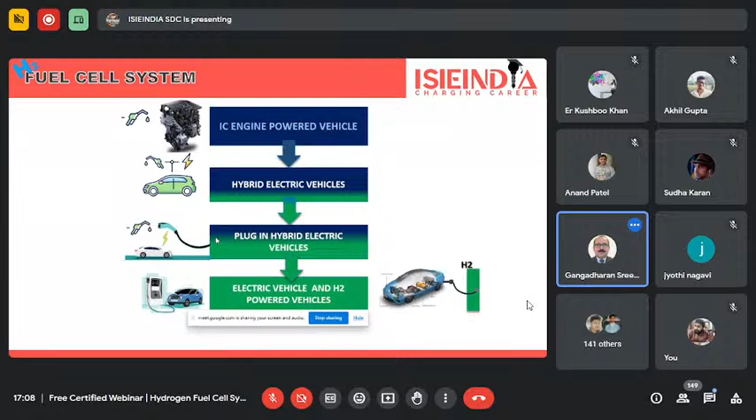In this section, we are going to discuss the fuel cell system and fuel cell transaxle, and also the hydrogen system diagram, high voltage system for safety inspection purposes, and also the service plug grip for safety and voltage inspection for high voltage safety. Finally, the refueling procedure, and also how the FC power can be shared for some other purpose like a power generator.

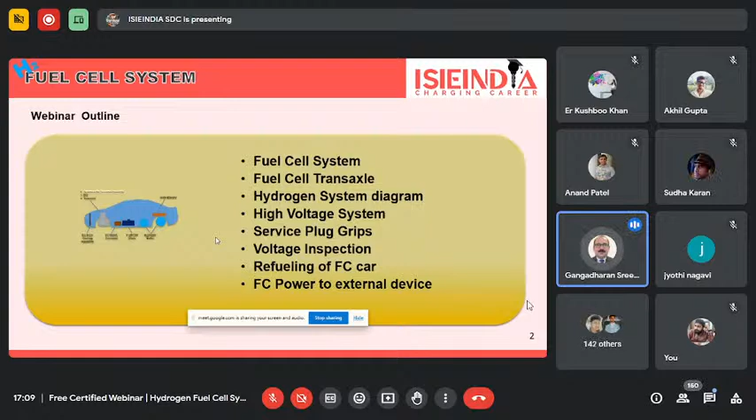We can use this vehicle for that purpose. So this will be the content of our presentation today. Let us start with the system diagram with the components of the fuel cell vehicle.

Here we are using Toyota Mirai as an example vehicle. In India, a lot of heavy vehicle industries have started fuel cell development, like Tata, whose prototype vehicle is already available in India. But globally, everybody knows the fuel cell Toyota Mirai sedan type vehicle is already running, with thousands of vehicles all over the world. In India, 2 vehicles are available, one with our union minister and one with another university.

So today our subject, we will use this vehicle as a standard fuel cell vehicle. Let us see the components of Toyota Mirai, starting with the NIMH battery. You can see on the top, the battery is located.

This will be the NIMH battery on the top, because a fuel cell vehicle is a hybrid vehicle. The fuel cell system cannot store electricity; it only generates electricity, we cannot store it back into the fuel cell. That's why we use one high voltage battery. For safety purposes, we are not using lithium ion batteries here, only NIMH battery. Maybe in the future we will have lithium ion batteries also with fuel cell type vehicles.

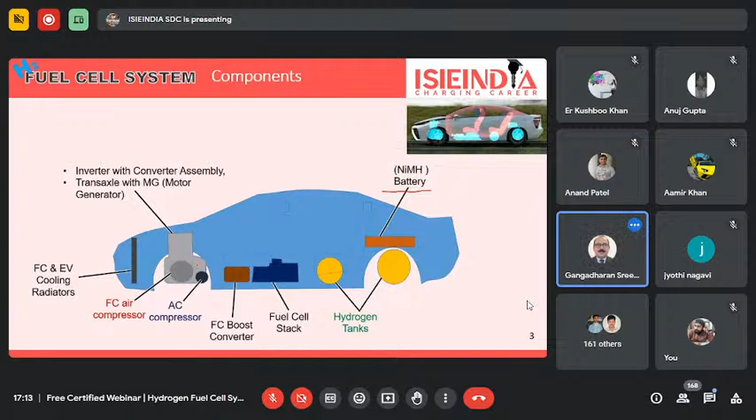And next is the air compressor, which is integrated with the inverter, converter and transaxle assembly. Then in front side, we have a cooling radiator, the FC cooling radiator, which we use for cooling the transmission, the FC fuel cell stack, and also this can be used to cool the battery if necessary.

Finally, the inverter with the converter assembly and transaxle with the MG, motor generator. So the inverter with the converter assembly receives power supply from the FC boost converter and then converts it into AC signal, AC power supply, and provides it to the MG motor. And also that power will provide to the FC air compressor. So these are the components and their functions.

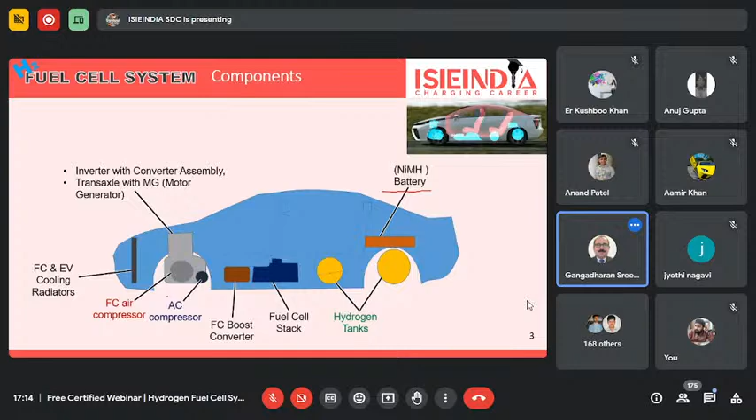Now you can see in this picture an actual Mirai vehicle with all those components we have explained, like the NIMH battery on top of the rear tank. The rear tank has higher capacity, around 62 liters of hydrogen we can store. And in front of that, there is one more tank provided, always under the rear passenger seat, the second hydrogen tank, which can store up to 60 liters of hydrogen.

Then we have the aluminum colored component, which is the fuel cell stack. The actual component is shown here. And in front of the fuel stack, we have the FC boost converter. This is the assembly having the inverter with the converter. So you can see the inverter with the converter.

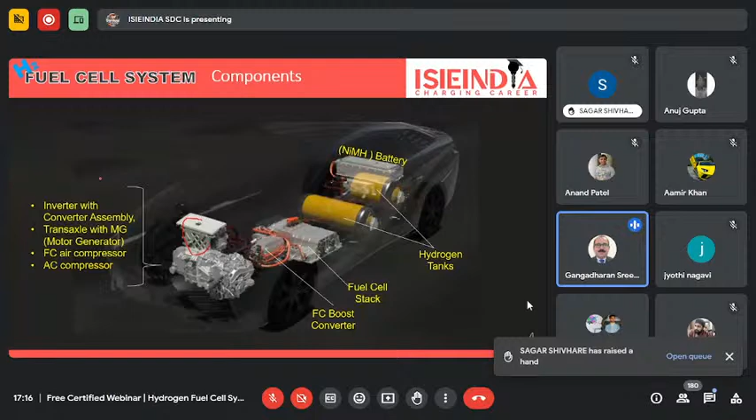And inside the transaxle, we have the MG, motor generator. Why motor generator? Because this motor, whenever it is in motor mode, it is driving the vehicle, and during braking, it converts into a generator and generates electricity. That electricity we can store in the rear battery. Then we have an FC air compressor attached with the same assembly, and also the AC compressor.

So let us see how these systems are functioning.

We have an air compressor attached with the inverter and converter assembly. That air compressor continuously compresses the fresh air through the filter, then sends it through an intercooler. The compressed air, while compressing, increases in temperature, so that temperature is reduced with the help of an intercooler, and that cooled compressed air is supplied to the FC stack.

The FC stack has supply from both sides. On the left side, the negative side of the FC stack, we supply hydrogen, and on the positive side we supply compressed air. So what happens? The FC stack generates electricity. It generates DC, around 370 voltage is provided by the FC stack as DC power supply.

That 370 DC power supply goes to the FC boost converter. That boost converter converts it into the necessary voltage level according to the driving torque, because this conversion is controlled by the fuel cell vehicle control ECU.

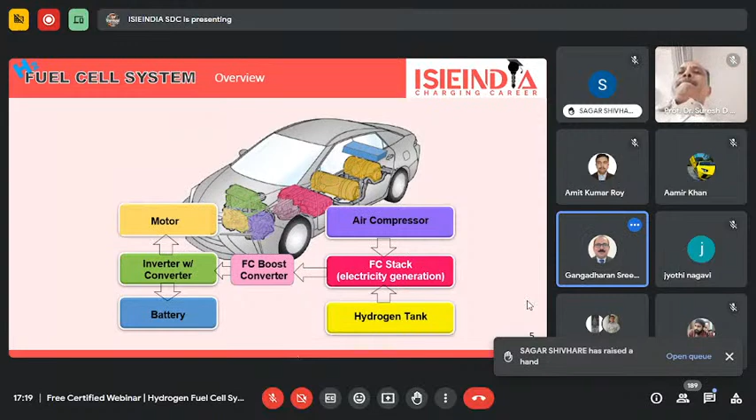Okay, so now I'm showing the fuel cell stack assembly. Am I audible? Yes sir, yes sir, yes, okay sir.

Okay, thank you. Now see the fuel cell stack in the middle of the vehicle, which was located in the earlier model. Now we have changed, 2018 onwards the design of this vehicle is totally changed. The location of the fuel stack is inside the engine compartment.

When they produced the first model, Mirai, which is a Japanese word meaning future in English, at that time, to bring the center of gravity further low, they provided the fuel cell stack location under the driver seat.

So this fuel cell stack, as you can see in the animation, has around 370 cells connected in series. Each cell develops around 1 voltage maximum. When you supply maximum hydrogen and oxygen, it will produce 1 voltage. So depending on supply it can be less than 1 voltage, that is the capacity of the fuel cell. When you connect them in series, you get 370 voltage maximum.

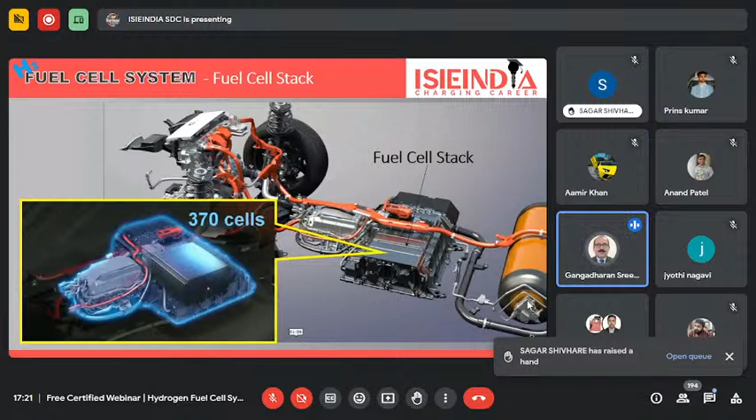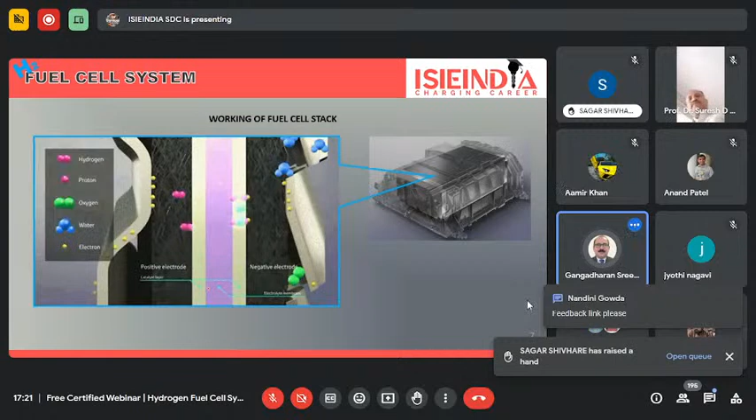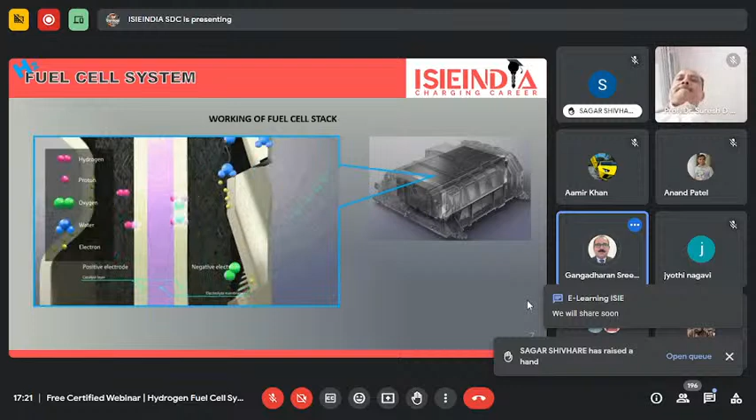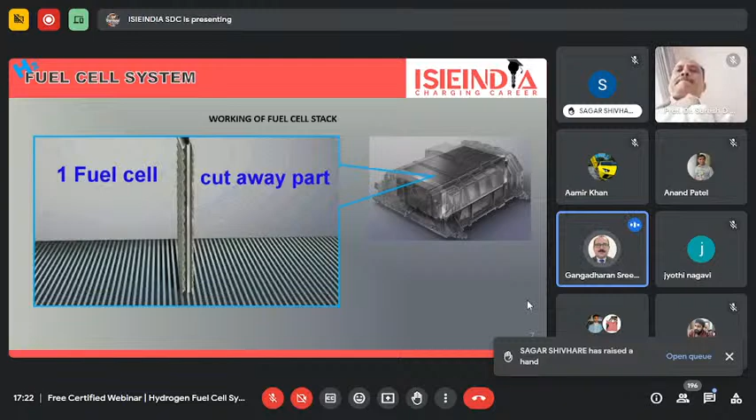Now let us see this fuel cell, how it is functioning. Here I am showing one sample cell, and in that cutaway you can see in the middle part there is a membrane located, a violet color membrane, which is a polymer electrolyte membrane, sandwiched with two catalysts for the positive side and negative side. On the other sides we have gas diffusion layers. So these are the major components.

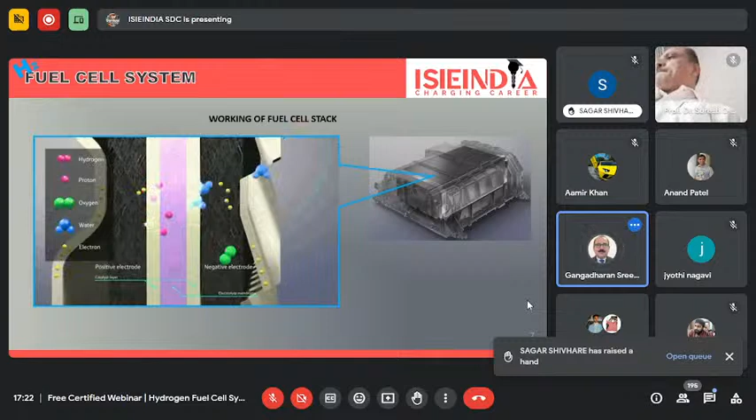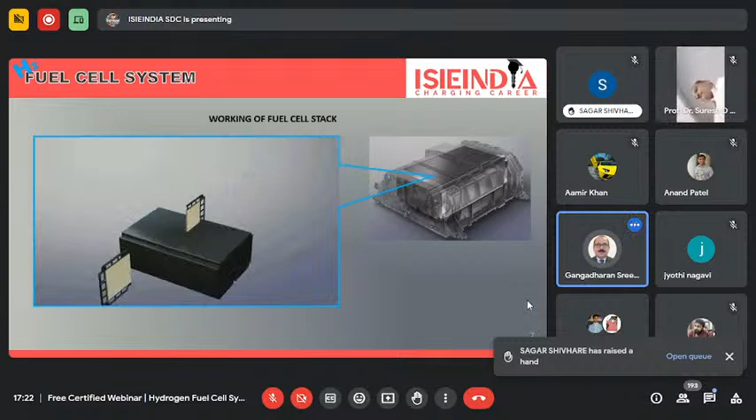What is exactly happening: through the negative side we send the hydrogen, and from the positive side we send the oxygen. What is happening as hydrogen moves, we can see the components through this, it will be more easy to understand.

You can see hydrogen, when it passes through the catalytic layer, it loses an electron. So any molecule or atom, when it loses an electron, what happens? This hydrogen molecule becomes ions. So the proton alone will move through the catalyst, through the membrane, to the positive side. What is happening to the electron?

The electron, which is passing through the electrode attached right after the gas diffusion layer, there will be electrodes, negative electrode and positive electrode. So the electron which is released from the hydrogen will move through the electrode and come back through the positive electrode to the

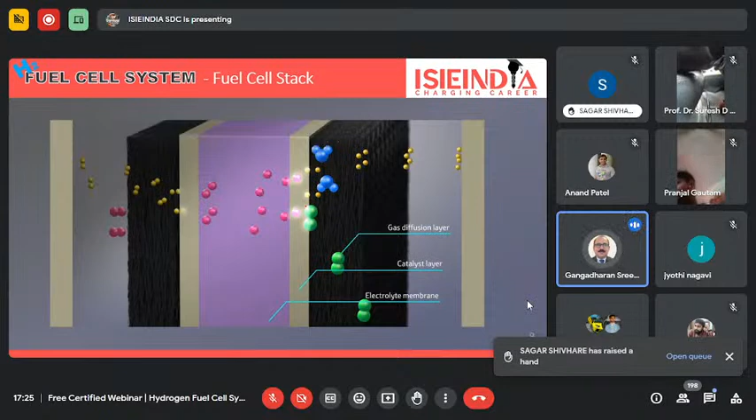So let us see the fuel cell stack, how the structural parts help assemble the 370 cells together. You can see both sides we have the electrode. This is the negative terminal which is connecting with the FC boost converter. This is the positive terminal. So in between, the cells are serially connected.

And we have a safety concern here. Do not touch this component if there is any chance - if there is hydrogen and oxygen inside the stack, what will happen? It can produce electricity. If the voltage generated is more than 60, that will affect our heart's ventricular valve, so it will be dangerous. We have to be very careful.

Just for studying purposes only we are explaining this, but when coming to actual practical work, or if there is any chance to measure or conduct any research, testing, or validation, and there is any chance to touch it, we have to use proper personal protection equipment like gloves and so on. So these are the structural parts to assemble all 370 cells together.

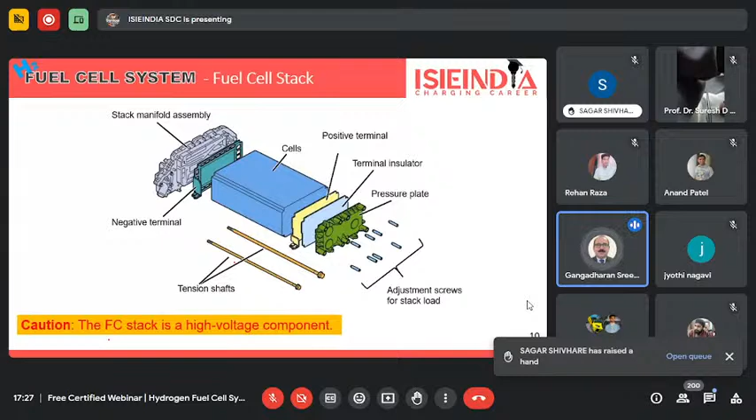Now, when we come to the individual cell in the actual fuel cell, how are they composed? Do you know the thickness of one cell is only around 1.3 millimeters? That means we have 370 multiplied by 1.3 - you know what will be the overall size. So it is a very thin layer.

In that, the electrolyte membrane with the catalytic layer and gas diffusion layer assemble together as one unit - that is the yellow part. That is the main device that generates the energy.

Then we have a supporting 3D fine mesh flow field, which helps the oxygen flow vertically. On the other side, you can see the holes provided on the side of the cell. Here we have the inlet of the hydrogen, and on the other side, this will be the outlet from where the hydrogen is coming out.

Okay, so hydrogen will circulate until the percentage density of hydrogen reduces, so the pressure will automatically reduce. There will be a pressure sensor, and the hydrogen supply system will act on top of the hydrogen.

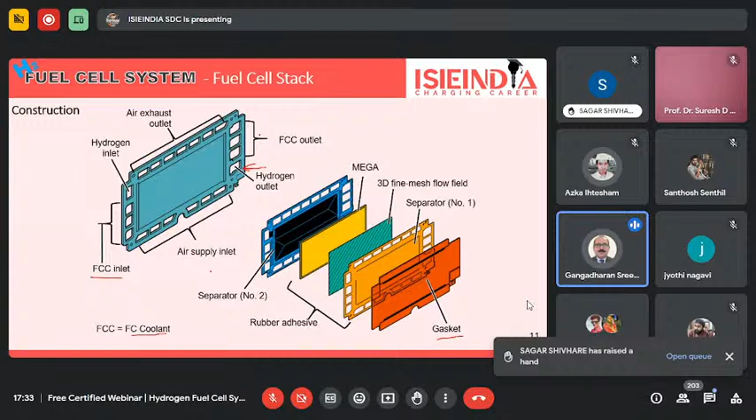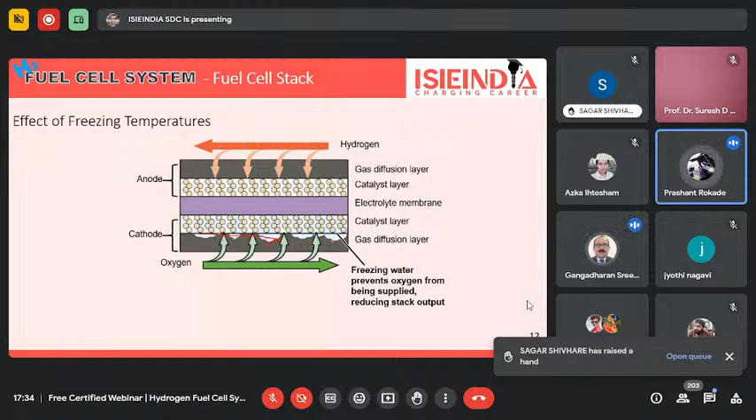Water is formed due to the chemical reaction happening inside the fuel cell - what reaction is happening? Oxygen and hydrogen merge together and they develop water. So the FC system produces water as a byproduct of electricity generation.

Some part of the water we are using to moisturize the air supply, because we are not supplying dry air - we need a little bit of moisture content, because the polymer electrolyte membrane in the fuel cell will work 100% efficiently only with the help of water. If there is a dry membrane, the efficiency of the membrane will be around less than 40%, or sometimes it can be below that. So to improve or maximize the efficiency of the polymer membrane in the fuel cell, we need water in the air system.

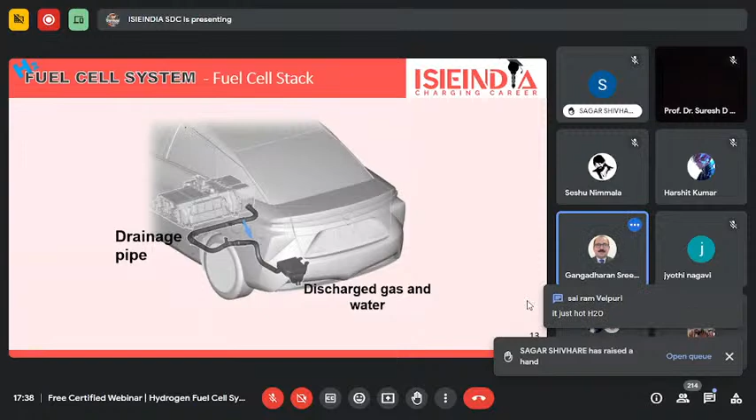Every electric vehicle has a motor and a motor speed reduction mechanism. Here we are using a planetary gear mechanism, and also a preloaded differential. Normally nowadays most vehicles use the preloaded differential system. For transaxle fluid, most manufacturers, even Hyundai, Kona, MG, all electric vehicles, use the same WS world standard automatic transmission fluid. The capacity of this transaxle is around 4.2 liters of fluid.

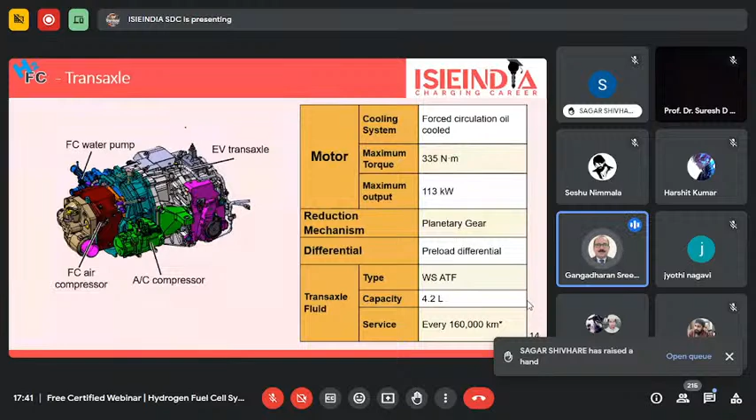What is the interval for changing this fluid? Normally companies say this is lifetime use, no need to replace. But if you can, change it every 160,000 kilometers, that is around 3 to 4 years of use, you have to replace it.

Now, when we are coming to the hydrogen system, so far everything okay? Am I audible? Yes, sir. Yes, sir. Okay.

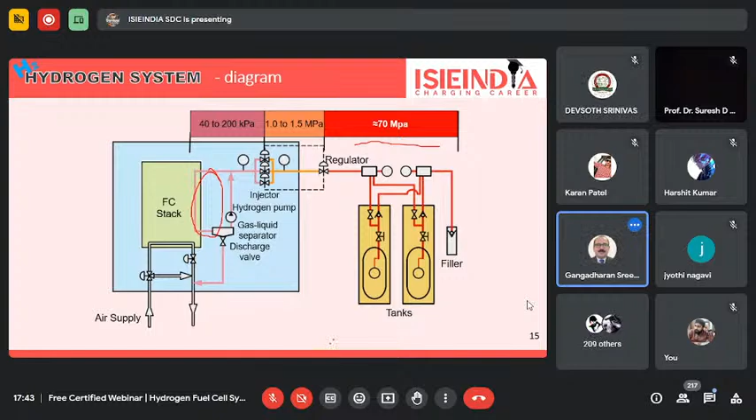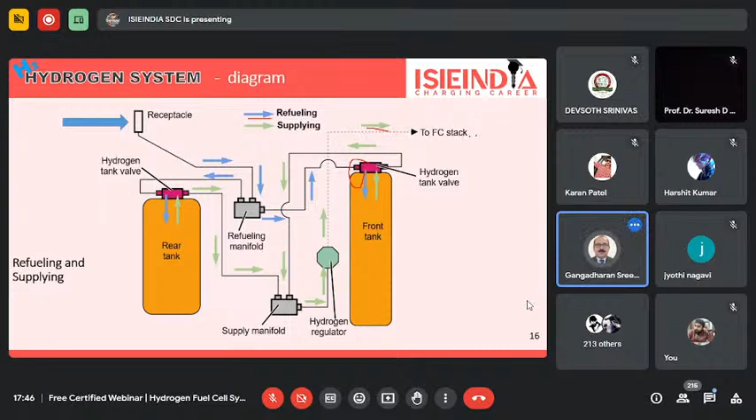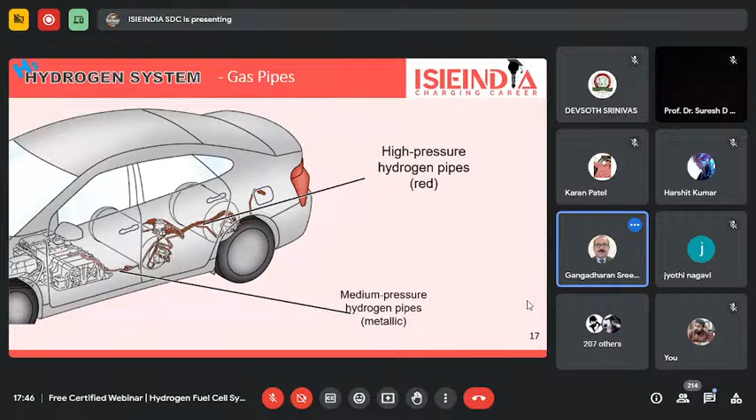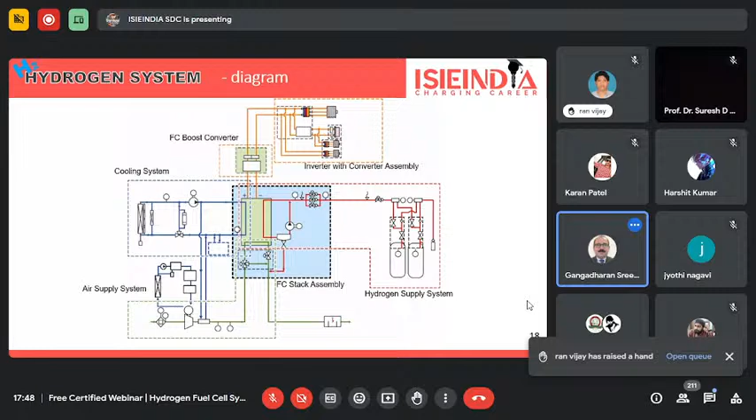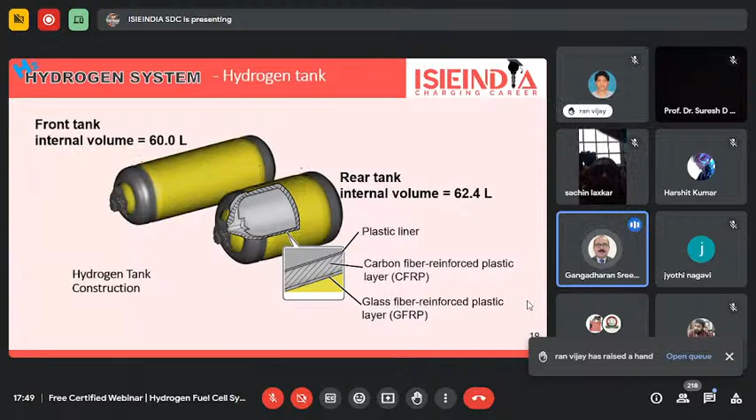See the capacity of both the tanks shown here. The tank which is under the driver seat is around 60 liters. The tank provided at the back side of the driver seat is around 62.4 liters.

Now we are coming to the safety side of the hydrogen fuel cell system. The fuel cell system is like a high voltage battery electric vehicle, also running with a higher voltage. Any voltage more than 60 is hazardous to human beings. So whenever we are handling this type of vehicle, we have to take special care. So what are the steps to handle the hydrogen powered vehicle?

First of all, whenever you bring this vehicle for testing, research, or even inspection to measure the voltage or pressure of the system, whatever you want to do, if you touch the high voltage area, we need to put a sticker on the vehicle. If you can provide the number of the technician working on that vehicle, that's much better. Both the instructions must be on the vehicle: this vehicle is under repair, please do not touch without permission. That warning should be there. That will be the first step.

Then we need personal protection equipment like safety shoes and insulated gloves. Insulated gloves means gloves with the ISI mark that can withstand up to 5,000 voltage. Gloves are required.

Then, how to shut off the power supply first. Everybody knows how to turn off the vehicle, but you should not keep the ignition key inside the vehicle. Keep the vehicle key after turning off the vehicle, keep the key away from the vehicle, around 1.5 meters away, so the key will not communicate. Nowadays everybody knows smart keys are there, that key will communicate with the vehicle, so at that time we can avoid that communication.

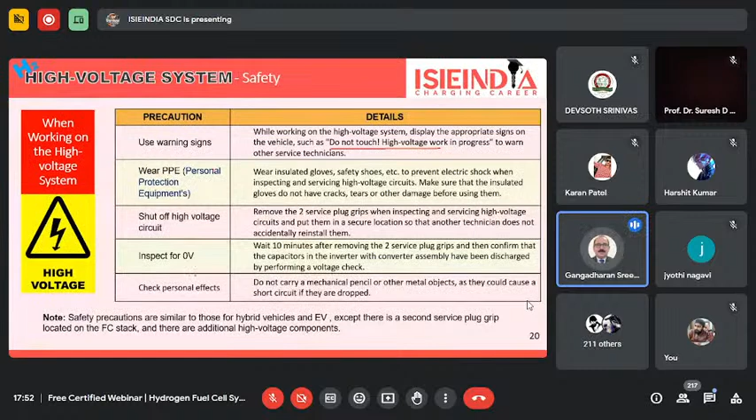After shutting off the voltage, we are going to remove the service plug, to cut off the high voltage from the fuel cell stack and also from the high voltage battery. Then we need to inspect. I will show you the steps one by one. This will be the high voltage service plug provided on top of the fuel cell stack, and one more will be at the backside with our high voltage battery. Both service plugs must be removed properly.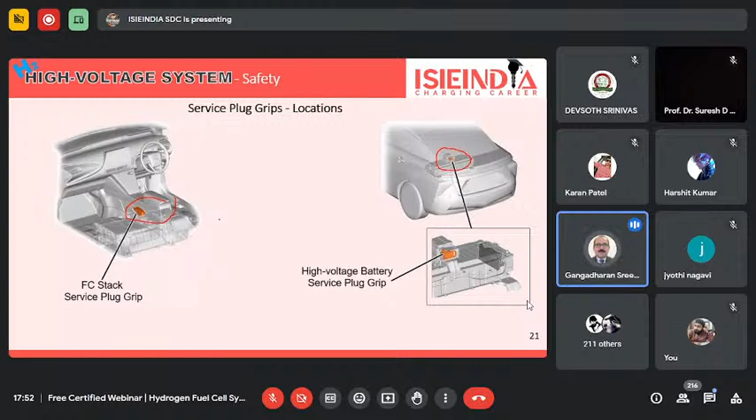So to remove it, we have safety precautions. Please wear ISI marked gloves, and then follow these steps. I'll show you the steps.

This will be the step for how to remove the service plug. First step, you have to pull it and then turn it 90 degrees, then take it out. While inserting it, we need the same procedure, just opposite: insert it, then bend it 90 degrees, then lock the system. There will be a clicking sound while you are pressing it back.

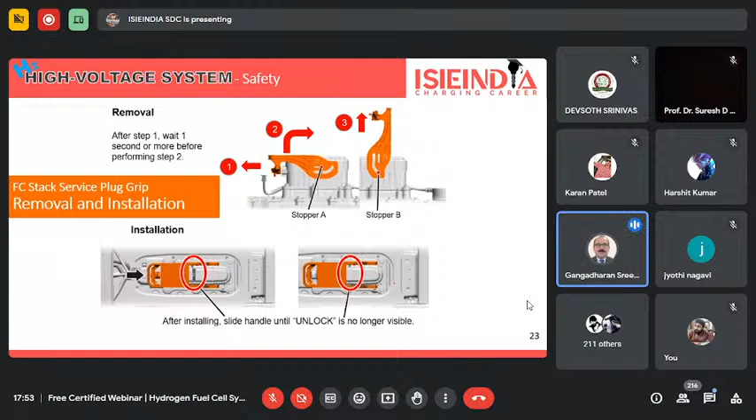If we want to touch the boost converter or any electrical components, we need to make sure that no voltage is provided by the FC stack and also the high voltage battery. Normally when you turn off the vehicle, these two relays will turn off the power supply, but we need 100% surety, that's why we are removing this service plug grip.

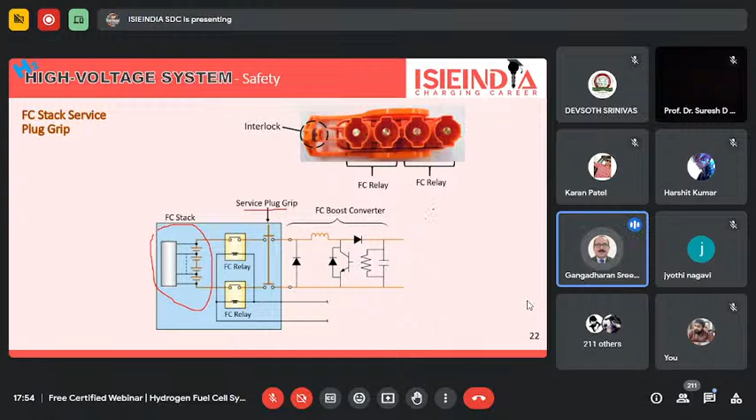So there is no power supply to the outside circuit. What will be the next immediately after the fuel cell stack? Our boost converter, so the boost converter will be switched off immediately. So no power supply. But still we cannot believe because there is one more step available, we need to make sure that system voltage is zero.

So we have an inverter converter assembly in the engine room. Just open the hood and there we can find two inspection points provided, one for negative and one for positive. So we have to use a voltmeter that can measure up to 750 voltage, because this boost converter uses a high voltage capacitor for boosting purpose.

So the inverter and converter, and also the boost converter, use capacitors. These capacitors can store some amount of electricity, so to make sure, we need to measure it. Before measuring, you have to give a 10-minute time to let this capacitor self-discharge. After 10 minutes only, both the service plugs have to be removed first, then we come to measuring and confirming zero voltage.

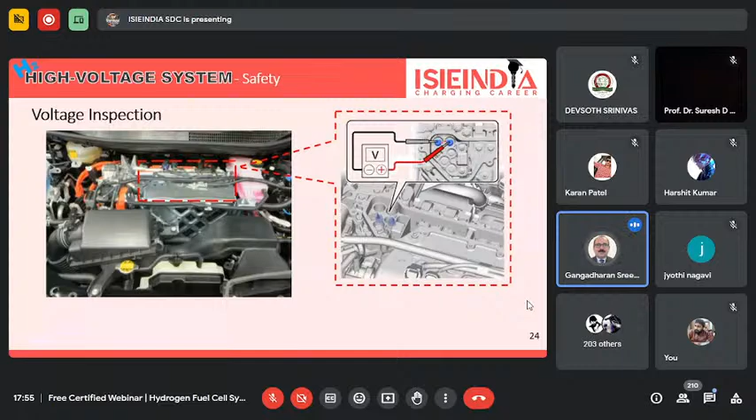Once it is showing zero voltage on the multimeter, now you are free to do anything, any inspection, because nowadays fuel cell vehicles in India we are just using for studying purposes, doing some testing, some validation process, everything going on at the university level. That's why I'm giving this instruction, because we have to be very careful about the high voltage system.

Now, how to do the refueling? For refueling also, there is a button available to open the fuel tank lid, but it is not the same as our conventional IC engine vehicles' petrol tank, where pressing automatically opens it. Here you have to turn on, press the button, then turn off the switch.

First of all, it comes out from the ready mode, meaning turn off the ignition and remove the key, then press the button. Within 5 minutes you have to come and do the next step, because if you do that after 5 minutes, you have to repeat the same process again. That is for safety purposes, so we have 5 minutes to come and press the fuel tank lid.

When you open the fuel tank lid, what is inside? Still one more cap is provided there. That cap is for safety of the receptacle inside, which connects directly to the hydrogen fuel tank. This must be kept very clean, no dust and water should be allowed. If that cover is open, don't even think about washing the vehicle or anything. Okay, so open it and fill the fuel.

After that we have to close the lid, then only the vehicle will move. If you forget to close the lid, the vehicle will not move, the ready mode will not come. So first we have to fill the hydrogen, then close the lid, then only you can turn on the vehicle. In case while filling hydrogen you come and touch the ready mode or use the key to turn on the vehicle, what will happen?

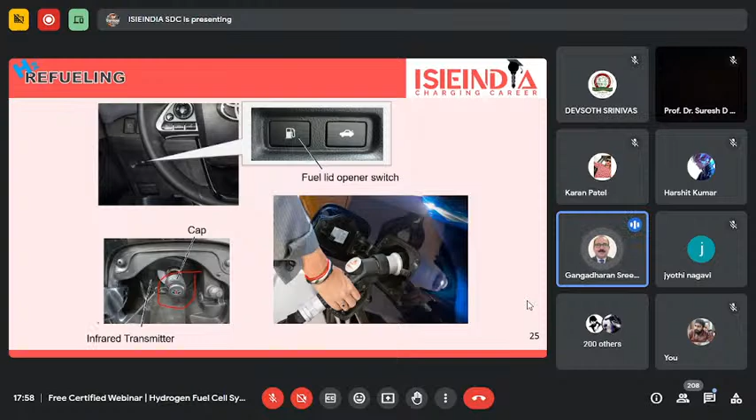Now we are coming to the last section. These vehicles' fuel cell stack just converts hydrogen and oxygen into electricity, so we can use this vehicle like a power source, like a generator. There is a plug available at the back side, open the trunk and you will see the steps shown there.

Number one, we remove the cover and insert the external power supply unit. Since we are using a DC source, we need an inverter. With that inverter you can operate any domestic appliance. The process is very simple: open and connect the external power supply unit, then turn on the power.

Then one more step: there is a DC out button available in the vehicle. While pressing that, you will get power supply. Even your house, if there is an inverter connection with your house, you can connect that plug with the vehicle. So you can use this vehicle like a generator.

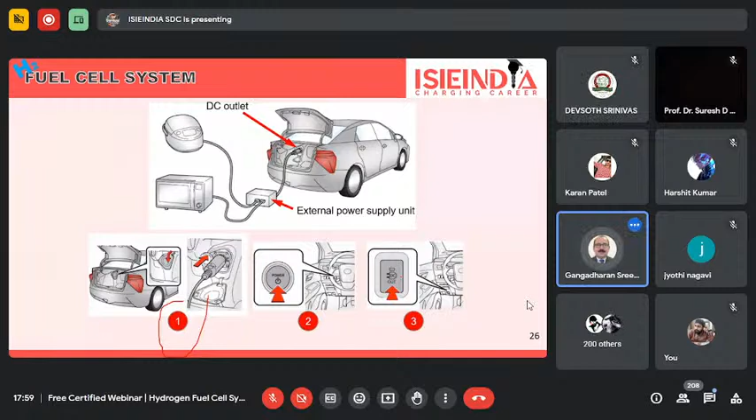Okay, so with that we are winding up. Let us see the subject again, the fuel cell system. In that we discussed the fuel cell stack and the cell construction, everything.

What was the next? Fuel cell transaxle, then hydrogen system diagram, high voltage system for safety, and also service plug for the safety, voltage inspection procedure for the safety, and finally refueling procedure of a hydrogen fuel cell vehicle. And a fuel cell vehicle can use like a power source for our domestic purpose. With that, we are coming up with the end of the presentation.

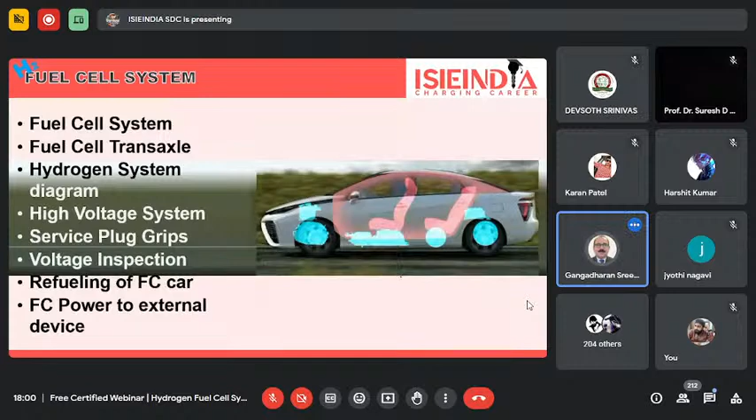Now, question and answer section. Do you have anything specific from the presentation, anything to discuss? Professor, I have one question.

Tell me. Actually, the major issue is safety with the use of hydrogen vehicles, right? Yes, exactly. Now, the vehicle I was showing throughout our presentation is the first generation, because at that time 70 megapascal capacity was the tank pressure capacity. Now they have reduced it. Toyota and other manufacturers also reduced it. You can see in India now a lot of heavy vehicle manufacturers are moving with the fuel cell vehicle, and also hydrogen powered IC engines are available nowadays. So the tank pressure is reduced now because of this safety issue, because if hydrogen is leaking, it is like a highly explosive gas. So you are correct. Continuous improvement is happening, and 4 sensors are provided inside the vehicle to observe the hydrogen leak.

Professor, my other question is basically, is it only the electrolysis process which will generate hydrogen, or are there other processes, like renewable energy sources, or biomass, from where we can get hydrogen? Because electrolysis is a very costly process, and the cost of the vehicle will also be affected if we use electrolysis. And second, another problem is generation of water, we need some kind of water also parallelly, right?

Want to expand your knowledge of electric vehicles and secure a good job in the automotive industry? Let us help you get there with our online and offline programs. ISIEINDIA offers specific domain courses as per industry demands, with perks like pay after placement, no-cost EMI, placement assurance, and globally valid certification by the Automotive Skill Development Council (ASDC) and National Skill Development Corporation (NSDC), Government of India. We have a range of courses in electric vehicles, computer-aided design and engineering, including postgraduate certification and executive PG programs in EV, professional master certification programs, specialization programs, fundamental programs, and internships in EV, CAD and CAE.

Our postgraduate certification program in EV is specially designed for students, with 120+ online learning hours and 100+ hours of industrial projects and internship, giving exposure to various computational tools for hybrid electric vehicle applications. It is a 12-month assured placement course with pay after placement, encouraging learning without financial constraints. The course is globally valid, certified by NSDC, Government of India.

Our executive postgraduate program in EV is specially designed for working professionals who want to upskill themselves or look for a career change in the EV industry, with 120+ online learning hours and 20+ hours of industrial projects. It is a 9-month assured placement course with globally valid certification from NSDC and ASDC, Government of India.

Our professional master certification program in EV, CAD and CAE is specially designed for undergraduate students to pave their career path by providing industry-relevant skills, with 100+ online learning hours and 5+ hours of industrial projects. It is a 6-month placement assistance course with globally valid certification from NSDC, Government of India.

Along with courses for skilling, reskilling and upskilling, at engineering institutes across India we are setting up a state-of-the-art facility, the Center of Excellence for e-mobility research and skill-based education, equipped with research and project-based learning-oriented experimental setups. This Center of Excellence is not only for educating students, but will also be utilized for research, innovation, and product design and development.

It is a combination of 6 labs, including the EV powertrain training and research lab, battery BMS training and research lab, EV charging and battery swapping lab, software modeling and simulation lab, innovation lab, and renewable energy lab. Each lab consists of customized workbenches and machineries, including the EV drivetrain experimental setup and motor testing workbench, hybrid drivetrain experimental setup with data logger, EV machine cutout section workbench, 2-wheeler, 3-wheeler and 4-wheeler training workbenches, battery load capacity testing, battery BMS with CAN protocol workbench, V2G setup, on-grid and off-grid charging stations, battery swapping, autonomous vehicle training workbench, solar power generator, and software solutions, and many more.

No matter which branch you study, we commit to skilling you and assuring success in your career. We have spread joy on thousands of faces, becoming their partner along the journey towards success. Join us and take advantage to unlock endless career opportunities.